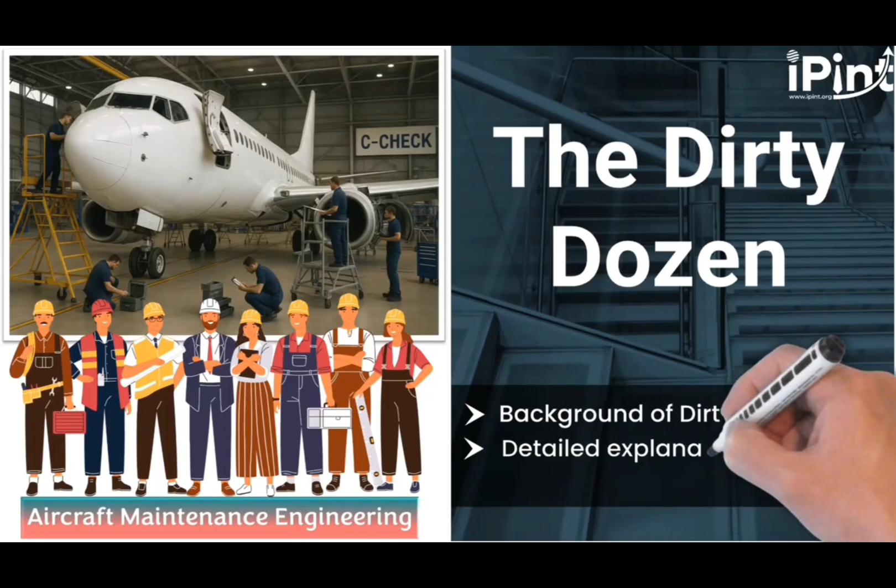Welcome to our training program, Dirty Dozen Masterclass: Human Factors in Action for Aviation Professionals. This section lays the groundwork for the Dirty Dozen. We begin with a little background on the Dirty Dozen. Afterward, we will explain each of the 12 factors one by one, showcasing real-life scenarios and examples to improve your understanding. It will have 12 topics, each one connected and essential. Let's begin with the Dirty Dozen and build from there.

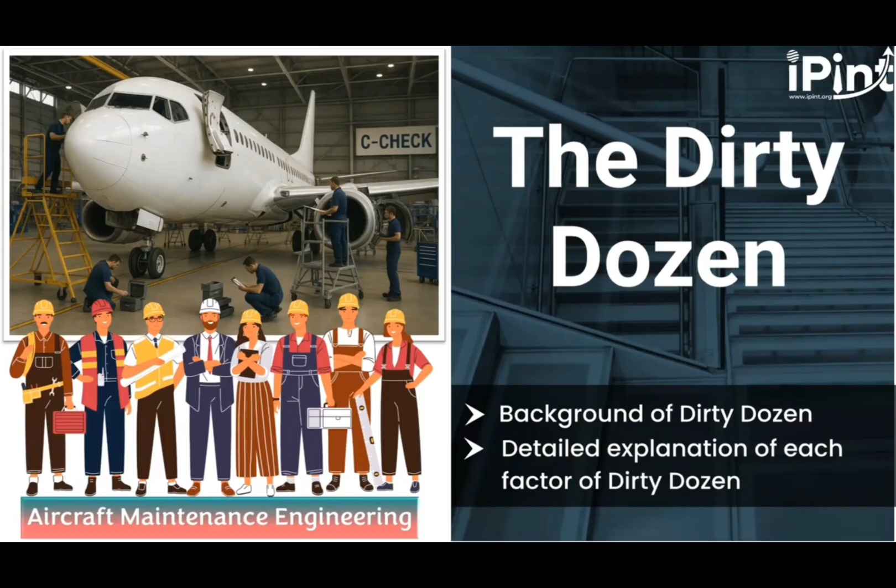Before we get into the Dirty Dozen itself, I want to take a moment to show you something, because these are not textbook examples. These are real incidents, real mistakes that happened in real aviation operations, just like the ones you're part of every day.

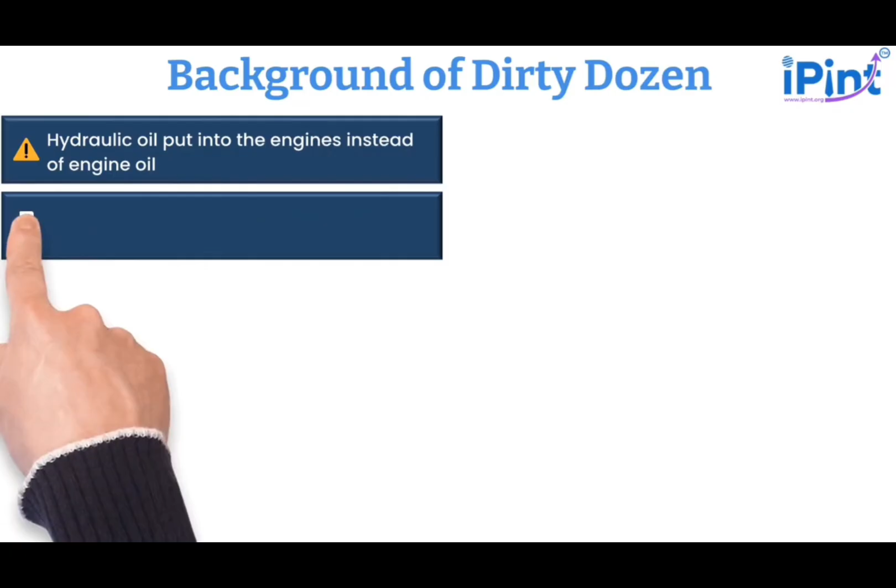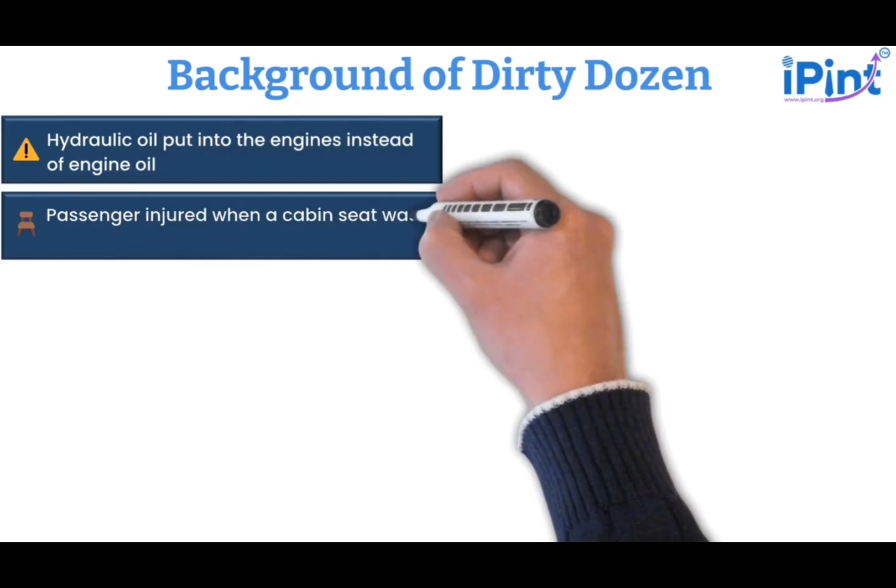Take a look at this slide. Hydraulic oil was put into the engines instead of engine oil—two different fluids, one critical mistake, and an aircraft that should never have been released for service. A passenger was injured because the cabin seat was left unlocked after maintenance. The work was done, the job was signed off, but one final check was missed, and someone paid the price for it.

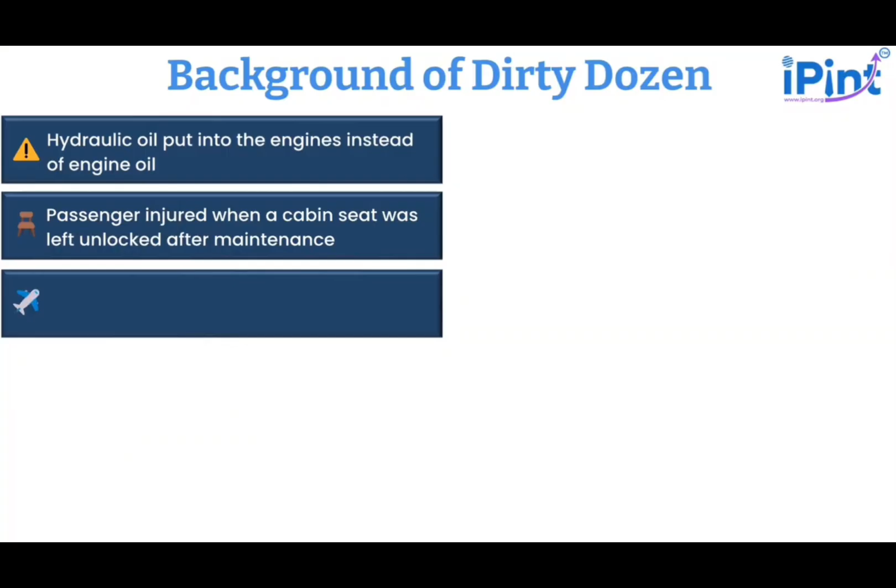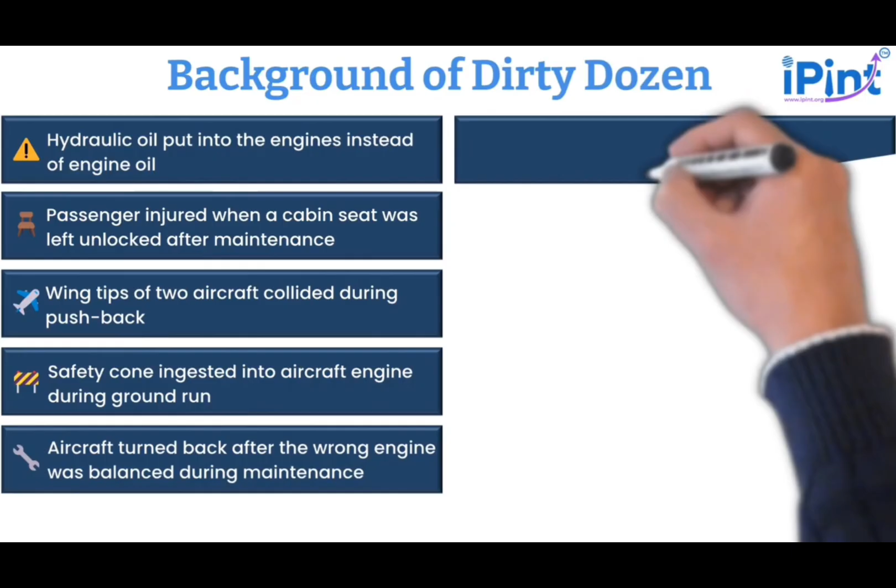The wingtips of two aircraft collided during pushback on the ground before the flight even began—a moment of inattention, a lack of coordination, and two aircraft were grounded. A safety cone was ingested into an aircraft engine during a ground run, a cone that should have been removed but wasn't, and the consequences were immediate and costly. An aircraft turned back after the wrong engine was balanced during maintenance—the task was carried out, just on the wrong engine, a simple but serious error that sent the aircraft back before it even reached its destination.

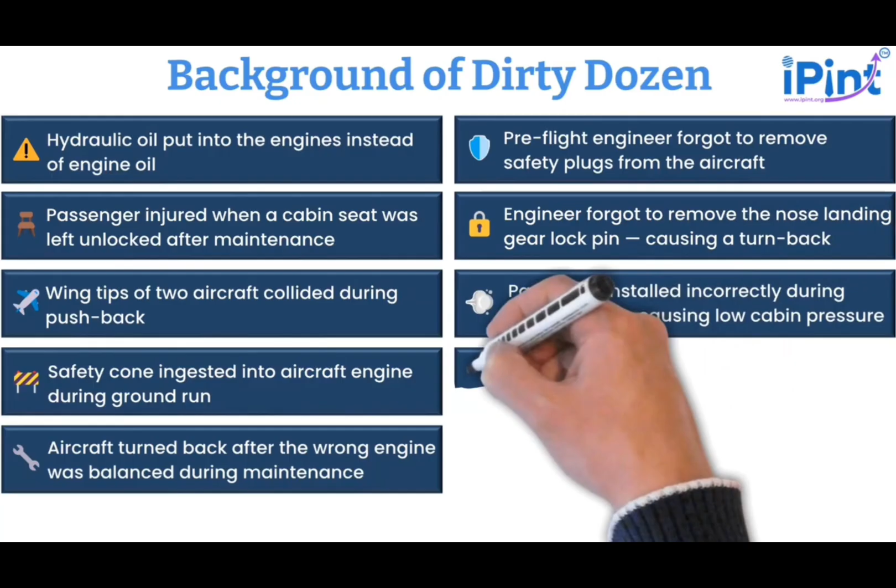Now look at the right side. A pre-flight engineer forgot to remove safety plugs from the aircraft—plugs specifically designed to be removed before flight—forgotten in a routine process that had been carried out hundreds of times before. An engineer forgot to remove the nose landing gear lock pin, causing a turn back—another removal task, another missed step, another aircraft had to turn around mid-flight. A panel seal was installed incorrectly during maintenance, causing low cabin pressure—not missing, not broken, just installed the wrong way, and the result was felt by every single person on board.

And a routine inspection overlooked the cockpit oxygen bottle pressure check. Routine—the word itself tells us the danger. When something becomes routine, it becomes invisible, and that is exactly when it gets missed.

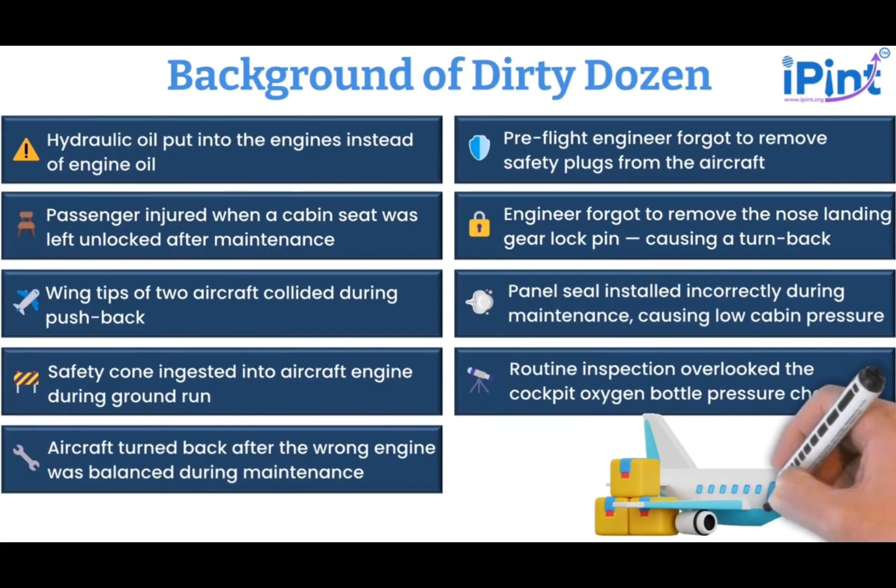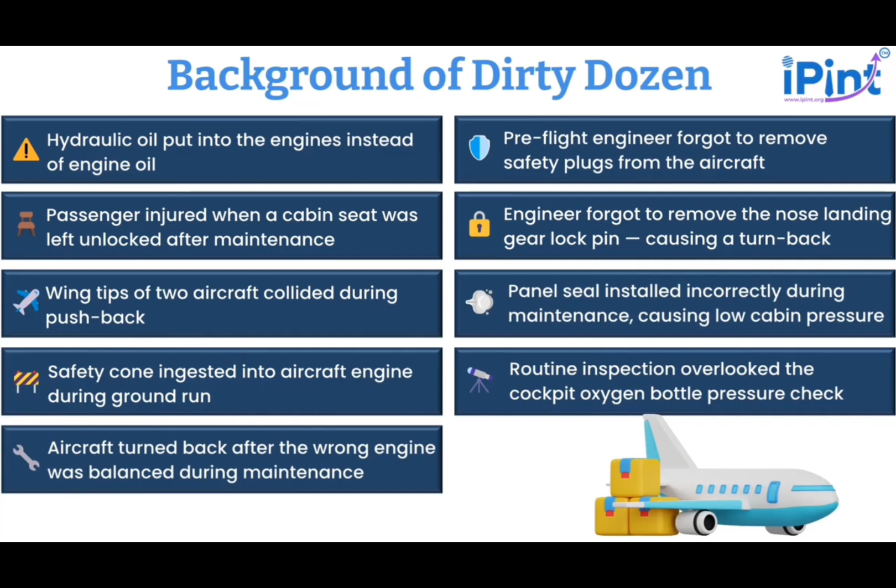Now, what do every single one of these incidents have in common? Not one of them was caused by a faulty aircraft. Not one was a mechanical failure beyond anyone's control. Every single one of them was preventable, and that is the entire point of what we are about to explore: the Dirty Dozen—12 human factor conditions that silently show up in maintenance operations every single day, and that, when left unrecognized, turn routine tasks into serious incidents. By the time we finish this section, you will not only be able to name all 12, you will be able to spot them in your own workplace, in your own team, and yes, in yourself, because awareness is always the first step to prevention.

So, what exactly is the Dirty Dozen? The term was first introduced by Gordon Dupont in 1993 while working for Transport Canada. He identified 12 specific human factor conditions that consistently contribute to errors in aviation maintenance—12 conditions that, when present and unrecognized, quietly increase the risk of something going wrong.

We call them the Dirty Dozen, and we are going to briefly introduce all 12 right now. Each one will be explored in full detail in the sessions that follow, but I want you to start thinking about them from this moment. We are confident that you will already be able to recognize at least one of them in your own workplace.

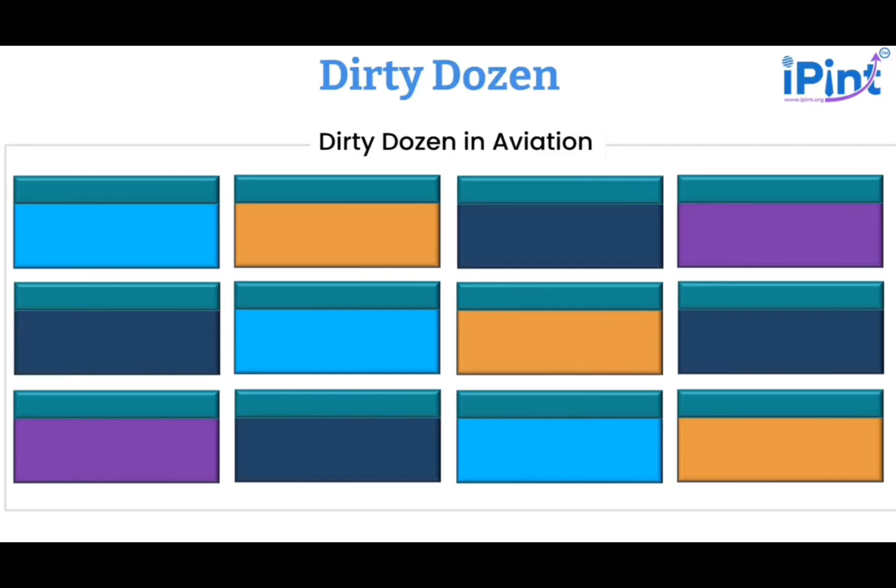Number 1, lack of communication: when information is not passed on clearly. Number 2, complacency: it creeps in when a task becomes too familiar.

Number 3, lack of knowledge: performing a task without the correct training, understanding, or up-to-date information is a risk that no amount of good intention can overcome. Number 4, distraction.

The moment our concentration is broken by a phone, a conversation, a noise, or a thought, the task in hand becomes vulnerable. Number 5, lack of teamwork: when people don't support one another or work in silos.

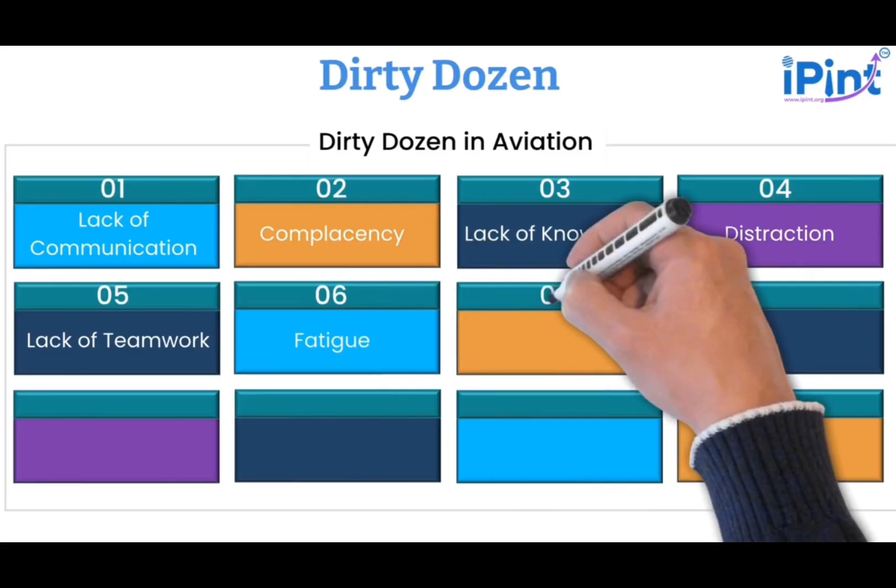Number 6, fatigue: a tired mind makes poor decisions. Number 7, lack of resources: the right tools, the right equipment, the right manuals, the right staffing levels. When any of these are missing, the people doing the job are set up to struggle.

Number 8, pressure. The pressure to get an aircraft back in service is real, and it is felt by everyone on the maintenance team.

Number 9, lack of assertiveness. How many times has someone noticed something was wrong, but said nothing? Lack of assertiveness means staying silent.

Number 10, stress: stress affects our ability to think clearly, process information accurately, and make sound decisions. Number 11, lack of awareness: situational awareness, knowing what is happening around you, what has already been done, and what still needs to happen, is critical in maintenance.

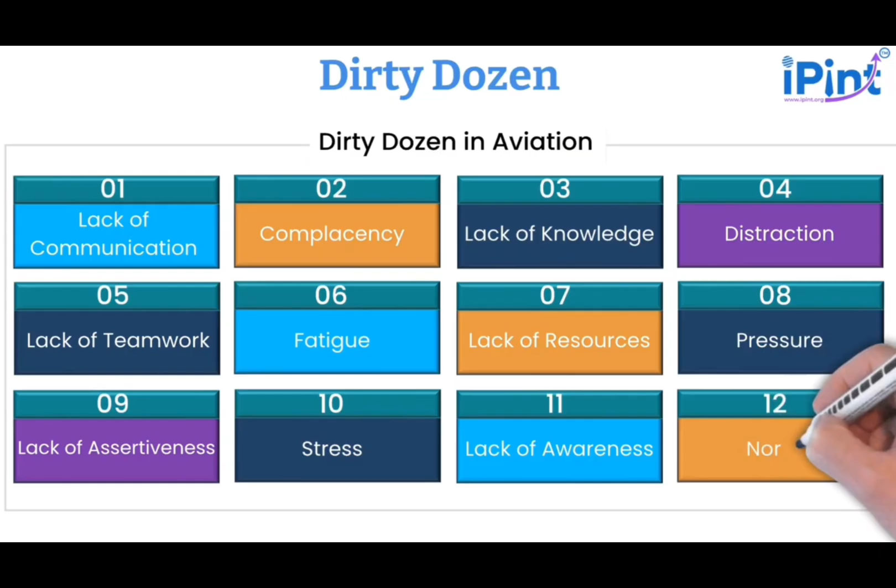Number 12, norms. Norms are the unwritten rules, the shortcuts, the workarounds, the 'this is just how we do it here' habits that develop over time. 12 conditions, 12 opportunities for error, and 12 areas where, with the right knowledge and the right culture, we can make aviation safer. We will be exploring each one of these in detail throughout the coming sessions.

But for now, I want you to hold on to one thought: the Dirty Dozen are not someone else's problem. They are present in every workplace, every team, and every individual, including us. Recognizing that is not a weakness, it is the beginning of wisdom.

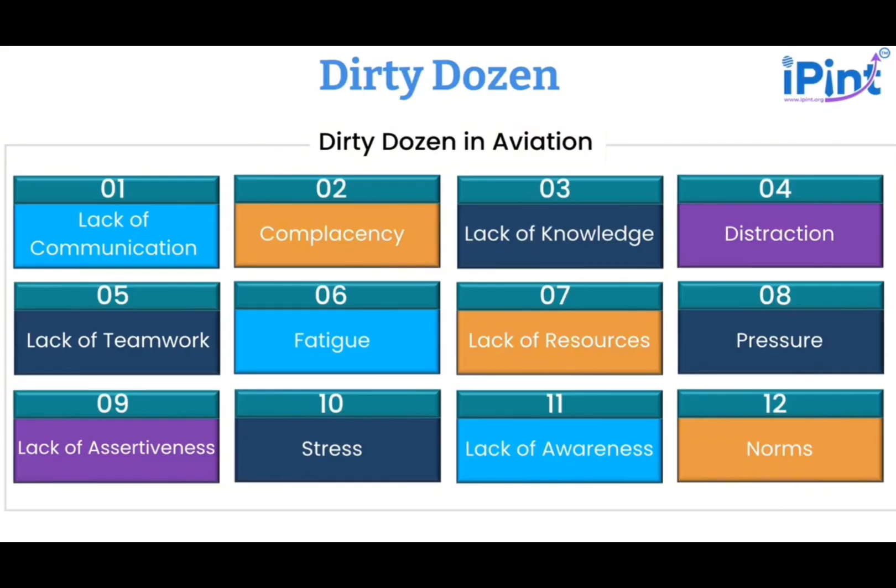Let's begin with the very first of the Dirty Dozen, and arguably one of the most common causes of error in aviation maintenance: lack of communication.

Because here is the reality: he doesn't know those tasks were completed. He believes they were. He is assuming. And in aviation maintenance, an assumption is not a fact.

What if tasks 3 to 7 were not completed? What if the first shift ran out of time or was pulled to another job and genuinely did not finish the work? Now the second shift carries on from where they think the first shift left off, and critical maintenance steps are missed entirely. The aircraft gets signed off, it goes back into service, and nobody knows that something important was never actually done. This is how communication failures become safety events, not through malice, not through incompetence, but through a simple human tendency to fill in the gaps with assumptions instead of verified facts.

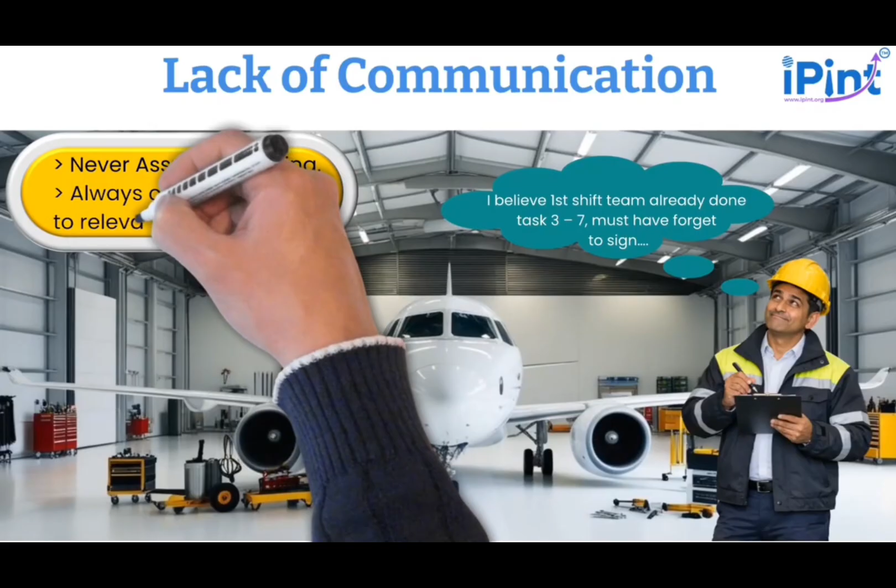Rule 2, always communicate with the relevant people. Before you begin a task, during the task, and when handing over to the next shift, talk to the people who need to know. A proper handover is not a luxury, it is a safety-critical responsibility.

Shift handovers are one of the highest risk moments in any maintenance operation. Information gets lost, context disappears, tasks fall between the gaps, and the next team picks up the job with an incomplete picture, sometimes without even knowing it.

The solution is not complicated, it is discipline, it is culture. It is the simple commitment to say, 'let me confirm that before I carry on.' Communication is not just about talking, it is about making sure the right information reaches the right person at the right time, in a way that is clearly understood. Because in aviation, what is left unsaid can be just as dangerous as what goes wrong.